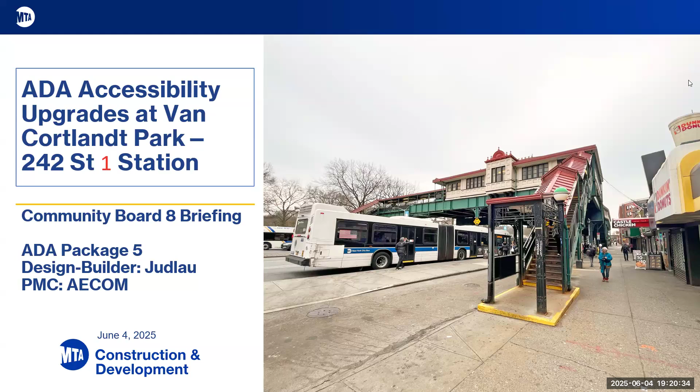Great, so some quick table setting. We're going to make some updates to you and the members of the public who are here. So we have our project scope, we'll flip through that. We have updated renderings to share with you, and we'll look at the former street view and get into why we sited the elevator here, because I know that's a question the board has posed to us in previous conversations. We'll look at the project footprint, the current MPT setup. We'll go over the milestone schedule, look at where we are, and we'll also flip through accessibility upgrades, as well as the state of good repair work at the station.

And there's a lot of state of good repair work. The station is over 100 years old, so we have a lot of work to do. Then we will review the construction impact mitigation, some of those efforts that we've taken. GCR will give a quick report, so I'll turn it back to Jonathan, and then we'll do some Q&A.

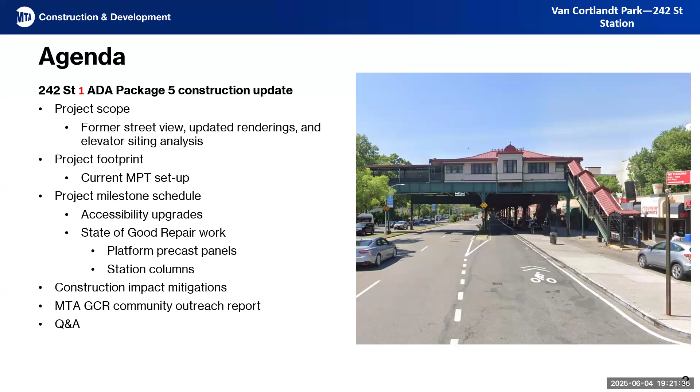Great, awesome. So like I said, the station is over 100 years old. It's a historic 1908 terminus station. We're addressing critical state of good repair work, as well as bringing ADA accessibility here for the first time, so all New Yorkers can use the station.

For ADA, we have a nice project scope of one new elevator from street to platform. And we're building a new street to platform stair on the west side of Broadway, right there in front of us, so we're just rebuilding that around the elevator. There was a stair there before, we're building a new one.

For the state of good repair work, we're going to be completely rebuilding the Island concrete platform. We'll be replacing it with concrete precast panels, and we'll be making repairs to the side platforms. We're repairing this platform's steel components, and we've also been making repairs to the station columns. Those need to be repaired, they've been there for a long time. We're replacing the island platform canopy roof, as well as the historic wooden floor in the mezzanine.

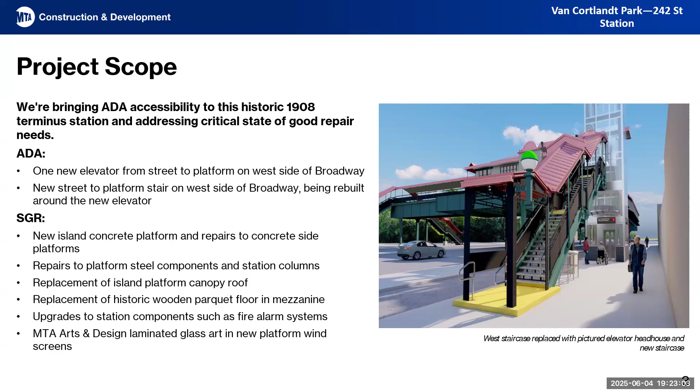At all these accessibility projects, when we're here, we're trying to do as much as possible to make the most of everyone's time. So we're also upgrading some station components, such as the fire alarm system. And we have a beautiful arts and design component in this station project -- we're going to be installing laminated glass art in the new platform windscreens.

Next slide. Okay, so here we have the street view prior to any ADA upgrades. This is, of course, what it looked like before we started construction. This is a very tight and challenging environment, and I'll get into a little bit more later why we sited this here, but I just want to show this so everyone can appreciate that we sited it at this location.

This service road, this no standing service road, allows us to set up MPT, our maintenance and protection of traffic, around our work site with the fewest impacts, not only to the flow of traffic, but also to parking. So this is a service road, it's reserved for authorized vehicles only. And by setting up here, we're actually only taking one legal parking spot. Next slide, please.

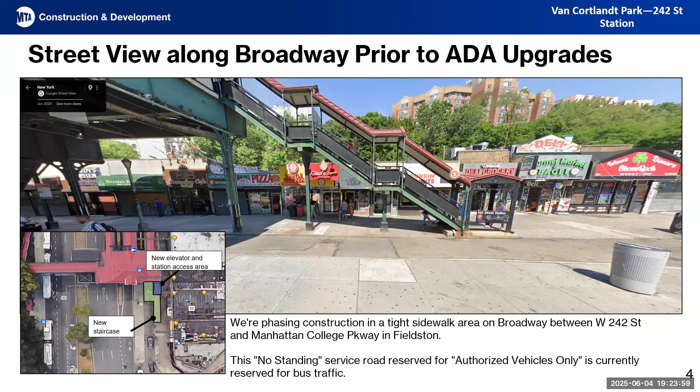Okay, so now we'll look at what it will look like after we're done. So we have a few renderings here.

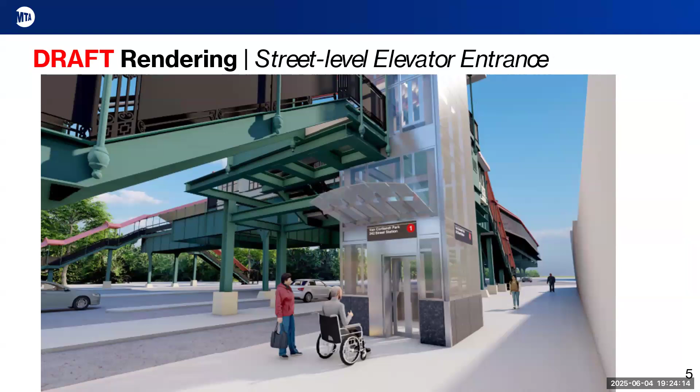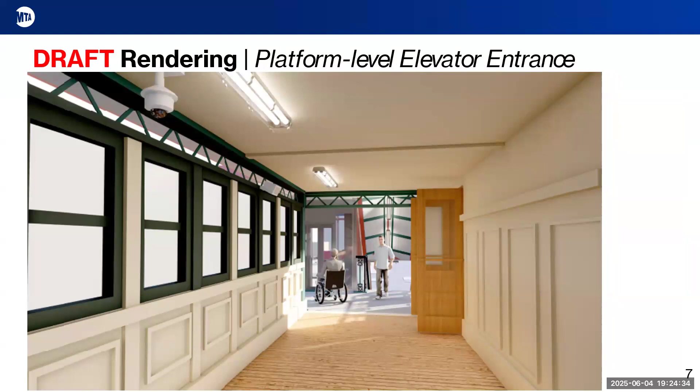Great, thanks. Okay, so more on why we sited this here. So many factors culminated to our final decision to site it on the west side of Broadway rather than on the east side.

Number one, when we're giving a new station or a station new ADA access, we really try to see it through the eyes of someone who needs this elevator to access the station, who would never otherwise be able to use the station. So for accessibility, that's the shortest path from the fare box to the elevator landing, and it's just the shortest path of travel for anyone who's in a wheelchair or any mother who has a stroller who might need to use an elevator. And that's much shorter compared to the east side.

For elevator constructability, it is very, very likely that had we built it on the east side, we would need to go through something called parkland alienation, which is a very long bureaucratic process, essentially because the park is on that side. We would have to make a deal with parks, and we would get land that is technically parkland, and then we would have to either pay or basically swap out land to compensate for that land we would be taking in order to build an elevator there.

We also looked at a ramp, but it would be very, very long, and this is a historic station, so that goes into all of the decisions we make with the design. We wanted to make it a little bit more compact to keep with the nature and the facade of the historic station components.

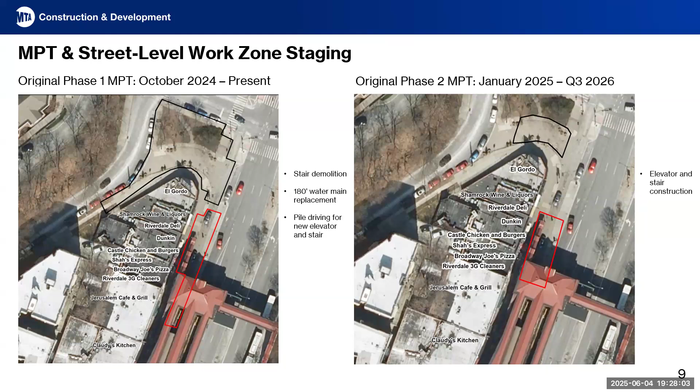We're doing the platform precast fabrication, which you'll see later, and then we'll be installing that a few months later, probably in the early fall, depending on when we can schedule more GOs. At the same time, we'll be replacing that mezzanine floor I talked about earlier.

And after that, we're moving on with the accessibility components. So we're finishing up the elevator. That means installing the glass, working on all the mechanics. We have an elevator machine room that we're also installing. And finally, the stair completion.

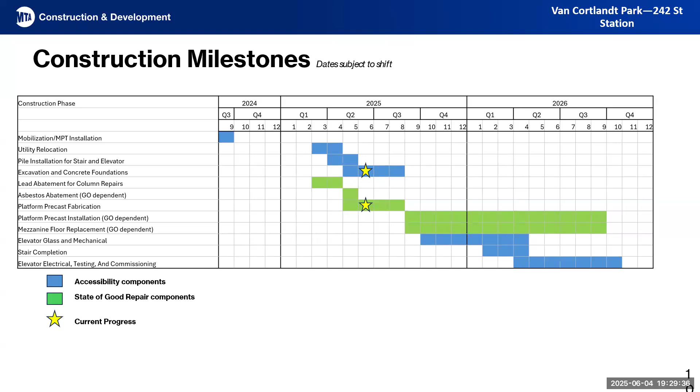And really up until the very end, we do all the electrical testing and commissioning. We run a lot of tests to make sure that this elevator will work and be good to go once we leave the site.

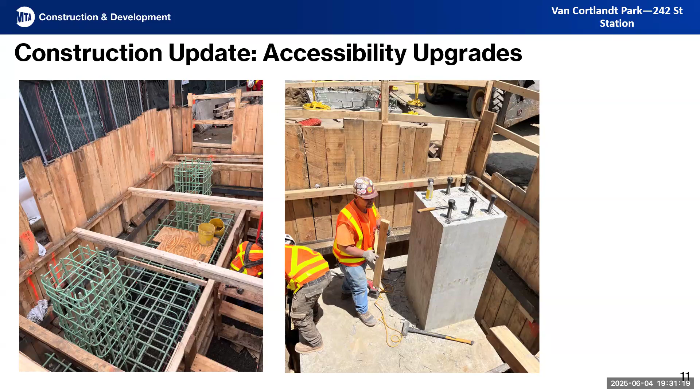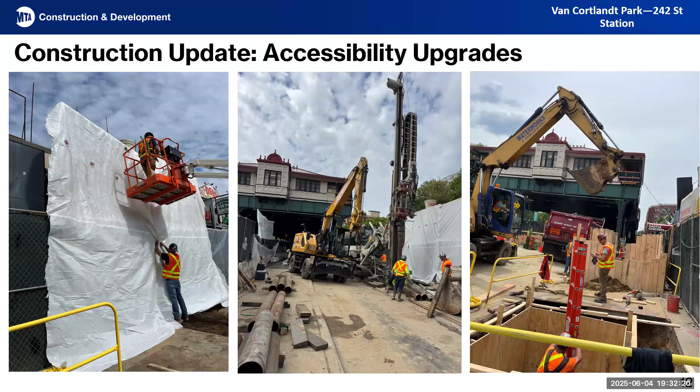State of good repair is also a big component of the contract. One of the bigger parts is the precast panel work. As of right now, the precast panels are being approved by the MTA and fabrication is underway. The entire center platform will be replaced in its entirety with new precast panels. In addition, the existing columns on the platform level will be repaired if any degradation or deterioration is identified. So that's a large component of our work, conducted on weekends during shutdowns.

We will be having a crane set up on the street level during those weekends. That'll start Thursday midnight or Saturday morning, and continue work until Monday morning, very early before the rush. We'll be staging precast panels on the street level, craning them up above so that our crews can remove the old ones and install the new ones. That'll be taking place starting in September and continuing until completion.

Also something to note, as Hannah mentioned previously, last month there was a service disruption, a one-weekend closure. During that closure, the asbestos found on the precast platforms was abated. That was done by an asbestos abatement contractor who performs this in a closed environment so that nobody is exposed to any environmental hazards.

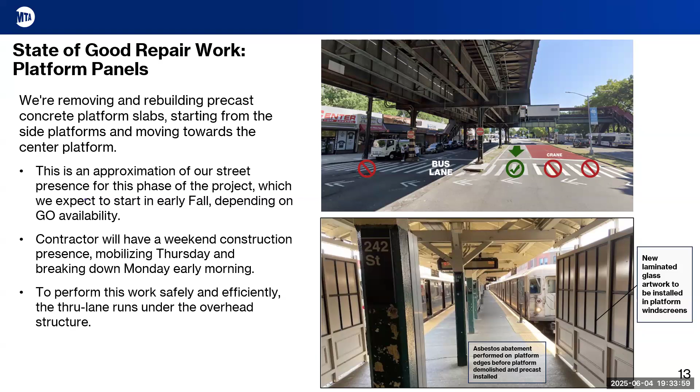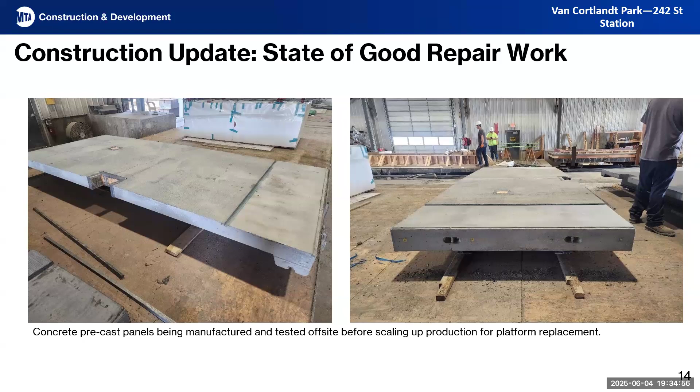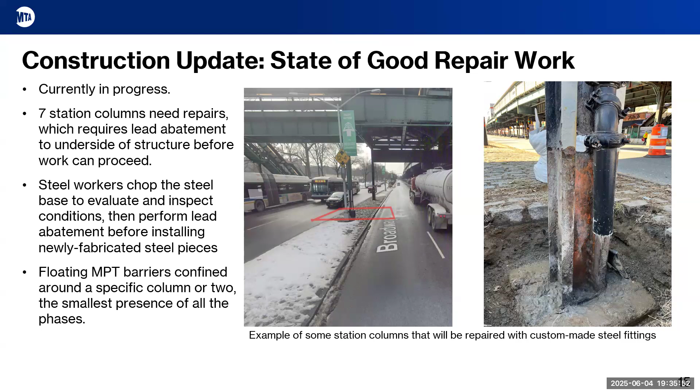Construction progress on State of Good Repair has started. This is a multifaceted piece of work. What happens first is we have to go up there and expose the columns. We abate the lead and then we assess the condition of the steel. If the steel is deteriorated and there's levels of deterioration, we take those measurements and refer back to our designer, and then we submit our shop drawings for approvals prior to going to fabrication. Right now we have exposed those columns, confirmed levels of deterioration, performed some abatement on them, and we are in the shop drawing process, soon to be fabrication. Once that steel becomes available, we'll have local MPT setups where our iron workers will come in, install the new steel, torque test, and inspection. We'll paint 3 coats to protect the steel from the environment, and then backfill accordingly.

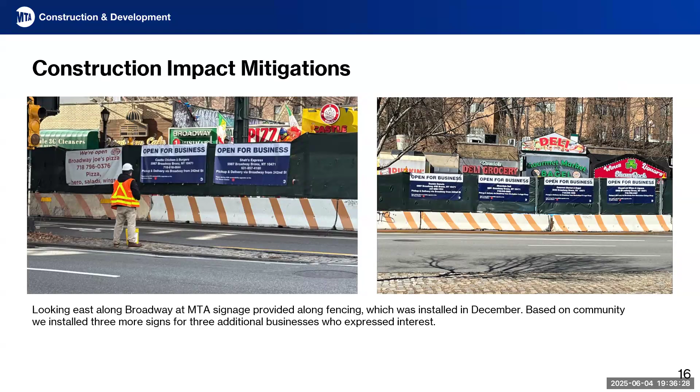Okay, and some other impact mitigations that we have implemented. At all times, we adhere to DEP mandated noise levels during construction. We really limit the jackhammering and other noisy work when we're opening up the sidewalk, as well as using drills to get through the rock bed, although that's not as noisy because the layers of dirt dampen most of the sound. With rerouting traffic, as Chris was talking about with the State of Good Repair project, specifically the precast concrete panels that we'll be using to completely rebuild the platform, we will use flaggers when that happens. That will happen much farther down the road in the fall, but we have thought out a really comprehensive traffic plan for sidewalk, crosswalk, and bus stop access.

On all of these projects, DOT requires that we have a crosswalk alternative if we need to occupy an area and close it for the work site, so there will always be crosswalks that are open. And the bus stop for the Bronx 9 bus route is just shifted a little bit down the block, closer towards 242nd Street. I'm sure many of you have seen that.

And then the closures again, so we require a few GOs in this project to do mostly the big State of Good Repair work that is involved here. During the station closures, there will be shuttle bus service provided, and Jonathan will send out construction advisories far in advance so that everyone can plan their trip, plan their weekend a little bit better.

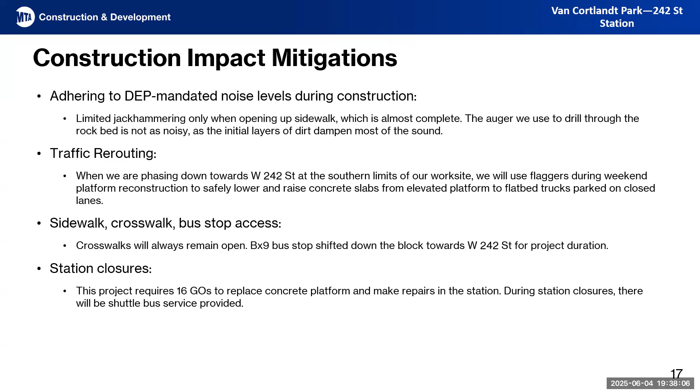Great. Thank you. So now I will turn it over to Jonathan.

Yep, thank you, Kana. So now I'm going to talk a little bit about the community outreach we have done. We have actively been engaging with local businesses, listening to their feedback, and taking direct action to address their concerns. Before the project began, we did storefront outreach. In October, we had outreach calls with local businesses affected by the MPT. In January, we did a site visit with local businesses as well, so we could give them a sense of what they can expect in the MPT. We have also, in March, provided a construction update to elected officials and the community board.

Some of the actions we have taken: every business has an open for business banner on the MPT, so customers know they are open for business, and also that they are able to accept deliveries. We have also expanded sidewalk access from 5 feet to over 6 feet to improve pedestrian flow and provide better access to cellars for business owners. We have also installed lighting to enhance visibility and safety, ensuring the walkway is fully illuminated during dark hours. We also have a dedicated hotline and email for businesses and community stakeholders to report any issues they have and receive a timely update from our team.

Now we're going to open the floor up to questions.

Later in May, we met with the Bronx CB8 Executive Committee, where we responded to a number of questions and comments they had for us about this project. We shared extensive feedback with the board, detailing our responses to their questions.

Later in May, our 'What's Happening Here' construction notice was published on our website. It's been posted across the corridor on Bailey Avenue and released to elected officials as well. Today is June 4th - here's our final informational presentation to the June CB8 Traffic and Transportation Committee meeting.

This is the project timeline for construction. Later this month, concrete construction will begin at 4 intersections: West 230th Street, West 233rd Street, West 234th Street, West 238th Street. Van Cortlandt Park South is part of a larger project that goes into the park, which was first presented to the community last year.

Bailey Avenue will also be resurfaced, scheduled for late summer. Following the resurfacing, markings and vertical elements will be implemented, and the full project should be completed by fall 2025.

This is the project location: Bailey Avenue from Van Cortlandt Park South to West 225th Street. It's 1.1 miles, adjacent to the Major Deegan Expressway, and a block from the 1 train on Broadway.

There's a mix of uses along the corridor - residential, commercial, light industrial, and some parks between 233rd and 234th Street. There are 2 bus routes that use Bailey Avenue north of West 230th Street, and it's also a marked local truck route.

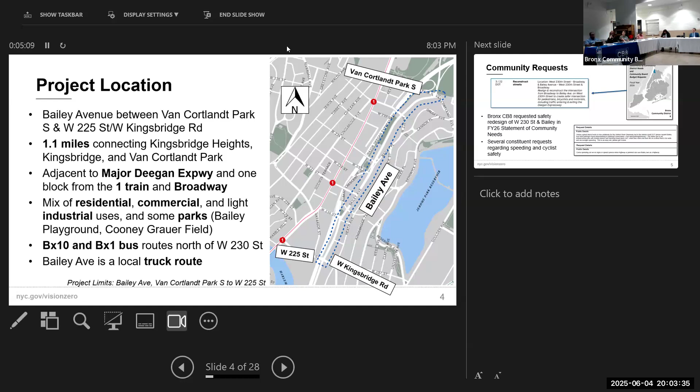We first started looking at this project in response to community requests. Community Board 8 made a request to DOT regarding safety at the intersection of Bailey Avenue and West 230th Street. We also received constituent requests about pedestrian safety, cyclist safety, and speeding on the corridor.

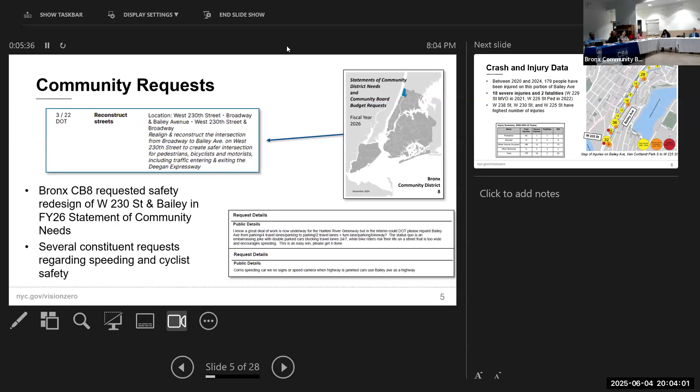This is borne out in the data - this is really why we're here. I want to reinforce this slide, because to me it's the most important one. Between 2020 and 2024, in those 5 years, 179 people have been injured on this 1 mile corridor of Bailey Avenue.

There were 18 severe injuries and 2 fatalities. We highlight these severe injuries and fatalities because we call it a DOT KSI - killed or severely injured. This is shorthand for us to know where to dedicate our resources. The number of KSI incidents is 20: 18 severe injuries and 2 fatalities.

This is why we've been focusing on Bailey Avenue - it's an abnormally high number of crashes with severe injuries and fatalities that change people's lives and families' lives. I'll call out that 238th, 230th, and 225th Street are our most problematic locations - some of the busiest intersections with a lot of pedestrian and commercial activity.

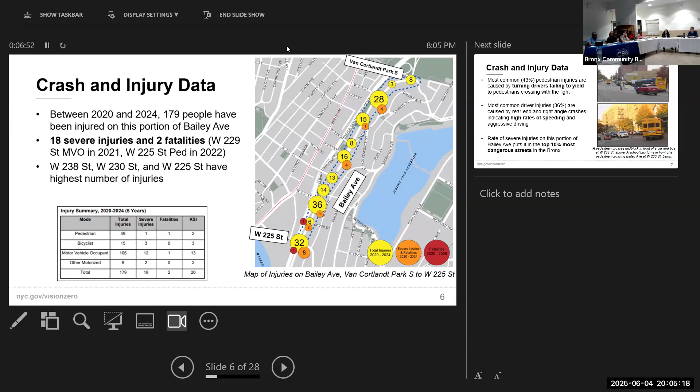We looked into the crash data under the hood to look at how these crashes were occurring. We have police crash data for all the crashes on the corridor, and the most common pedestrian injuries were drivers failing to yield. These were pedestrians crossing with the right of way in the crosswalk, doing the right thing, and still hit by a car that was supposed to yield to them. So 43% of the pedestrian injuries occurred when drivers failed to yield in the crosswalk.

The most common driver injuries, of which there are many, are rear end or right angle crashes, which indicate high rates of speeding and aggressive driving, which is obvious if you just spend any time on the corridor. As I said earlier, this rate of severe injuries puts it in the top 10% of the most dangerous streets in the Bronx.

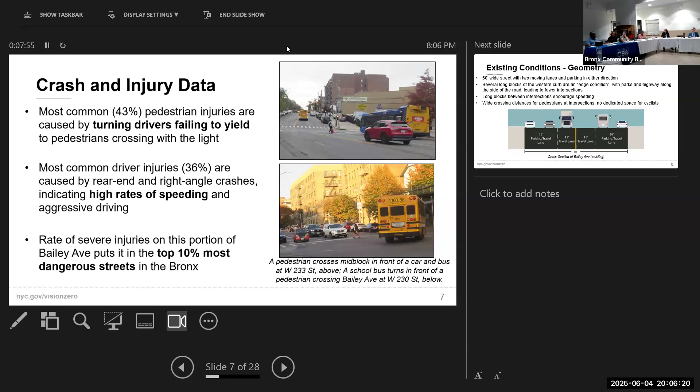Next slide, thanks. This is a cross section of the corridor. The left side is cut off, I'm not sure why, but in general, there's some areas that are a little different. In general, we have a 60-foot cross section of Bailey Avenue with 2 moving lanes in either direction and a parking lane along the curb in either direction.

We also have several very long blocks. This is because the west side of Bailey Avenue is something we call an edge condition, where we're adjacent to the Major Deegan for many of those blocks. So those long blocks further encourage speeding because there's nothing in between 225th and 230th Street. It's just a straightaway, so there are opportunities for further speeding along those edge conditions.

And then at intersections, we have at minimum, sometimes larger than 60 feet for pedestrians to cross. So there's very wide crossing distances, and we also have no dedicated space for cyclists.

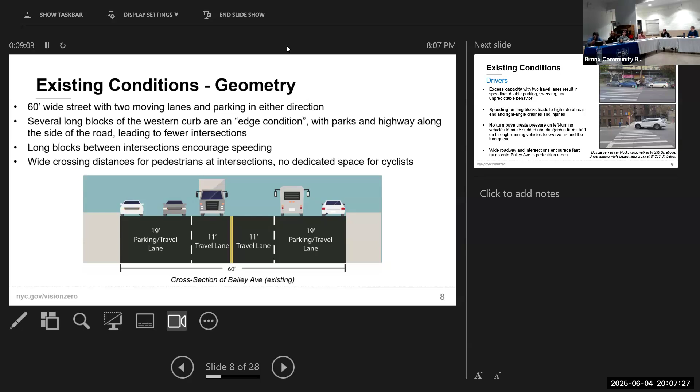Next slide. Going further into the existing conditions, for drivers we see excess capacity. These 2 travel lanes are often not full, and we have speeding, double parking, swerving, and generally unpredictable behavior along the corridor. As we said earlier, this high rate of speeding leads to a high rate of rear end and right angle crashes and injuries.

And then we see this issue at basically every intersection on the corridor: there are no turn bays for left turning vehicles. This creates pressure if you're a vehicle in the left lane wanting to make a left turn, and there's a car behind you that just wants to go straight but they're in the left lane. They're putting pressure on you to do something erratic, something quick, and that's why we see some of these crashes.

So it's dangerous for pedestrians and drivers trying to navigate these intersections where you have speeding cars and a lot of swerving and unpredictability. Again, the wide intersections encourage fast turns. There's nothing really preventing drivers from taking a highway-like turn onto Bailey Avenue, coming off the highway maybe, and that's why we see some of these failure-to-yield turning injuries for pedestrians.

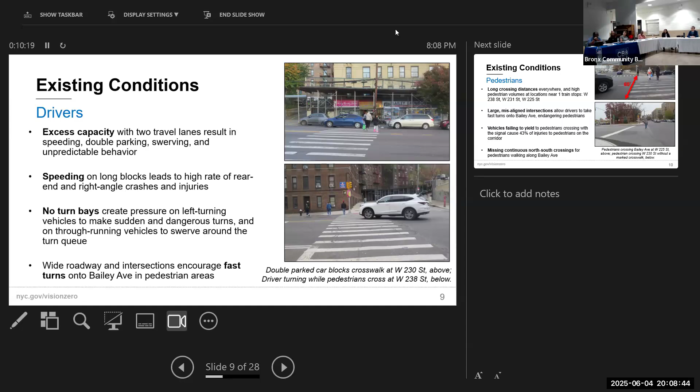Next slide. For pedestrians, there are long crossing distances everywhere, and particularly adjacent to the 1 train we see high pedestrian volumes. We took counts of pedestrians at every intersection, and saw the highest numbers at 238th, 231st, and 225th Streets. In a number of cases these intersections are not right angles, they're misaligned, a little off, so the turns are kind of shallow and can be made very quickly, which again endangers pedestrians.

As we said earlier, 43% of the injuries on this corridor are due to failure to yield. In a couple of locations, including this one at West 230th Street along the west side of the curb, we're missing crosswalks for pedestrians. This happens in a few locations, but as you can see, pedestrians still cross in a quite unsafe manner. This also happens at 234th Street right over here; there are a couple of slip lanes that don't have crosswalks across them.

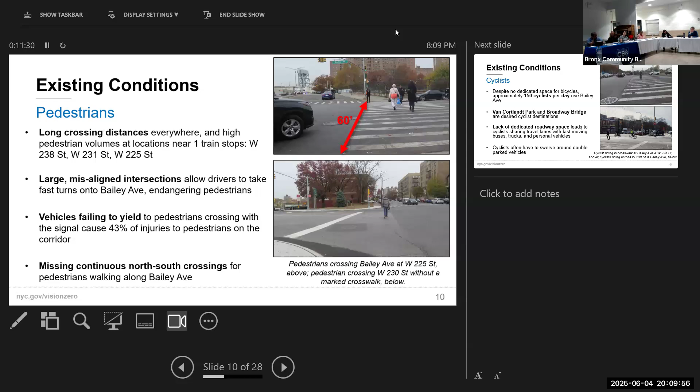Next slide. For cyclists, despite no dedicated space for bicycles, approximately 150 cyclists per day use Bailey Avenue. Many of them are going towards Van Cortlandt Park to the north, or to Broadway Bridge to the south to get to Manhattan. The lack of dedicated roadway space leads to cyclists sharing travel lanes with fast-moving vehicles, buses, trucks, and the swerving and double parked cars we've just been discussing, which is an unsafe situation.

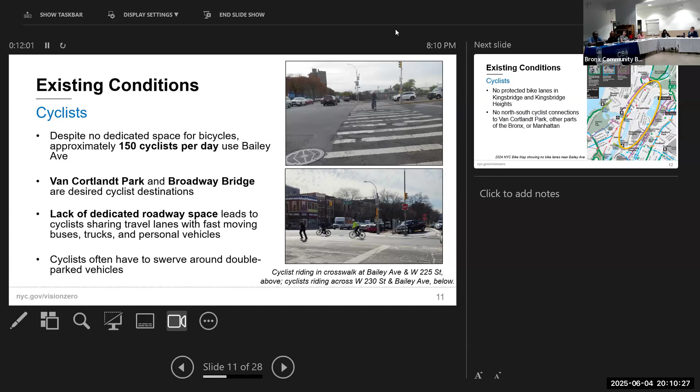Next slide. This is a bike map of the Bronx, and you can see there are no bike lanes in Kingsbridge and Kingsbridge Heights.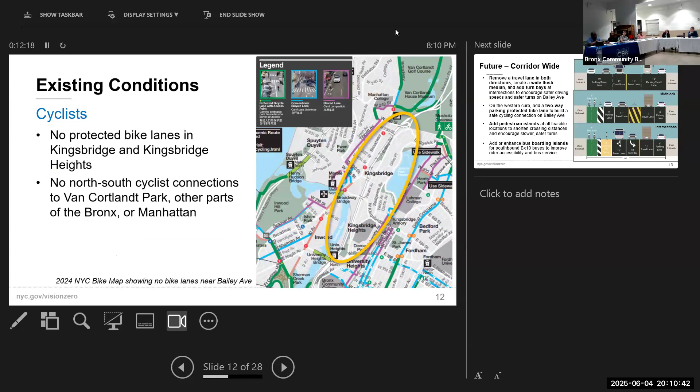So there's a gap in the network that's also in the current condition. Next slide. So this is the future condition on Bailey Avenue.

We're planning to remove a travel lane in either direction, create this wide flush median, and add turn bays at every intersection to encourage safer driving speeds, safer turns, and better vehicle organization. In the excess space on the west curb, there will be a two-way parking protected bike lane to build a safe cycling connection on Bailey Avenue.

At all feasible locations along the corridor, there will be new pedestrian islands, both in concrete and in paint, to shorten crossing distances and to slow down vehicles making turns onto Bailey Avenue. And in a couple of locations, for the southbound BX10 bus, we're going to be adding or enhancing bus boarding islands to improve rider accessibility and bus service.

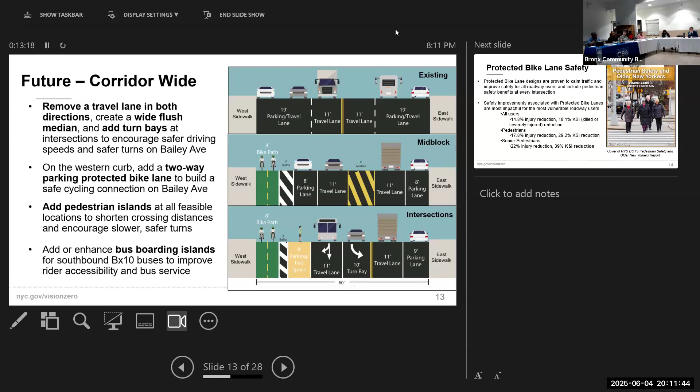Next slide. I just want to mention that we've done studies at DOT about designs like this one. In 2022, there was a pretty extensive study about these projects that DOT has been pursuing around the city for a number of years now. So we have a lot of good data about the safety benefits of it.

And we see that for all users, not just cyclists, but pedestrians and drivers, we see a nearly 15% injury reduction, but an 18% reduction of those KSI, killed or severely injured injuries. And I just want to call out the major piece of data from this study we want to highlight: for senior pedestrians, these types of projects result in a nearly 40% reduction of severe injuries and fatalities. So we see extremely meaningful and significant benefits for all road users when we install protected bike lanes, such as the one we're planning on Bailey Avenue.

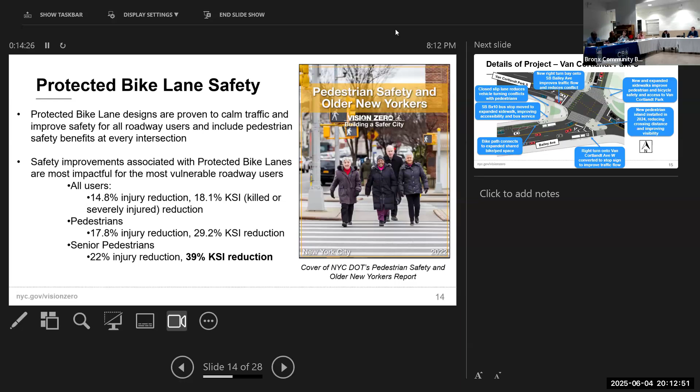Next slide, thank you. So I'll go through every intersection. Every intersection is different, as Anthony mentioned. And then I'll start from the north, head to the south, and then we'll be done. I can take some questions.

So starting at Van Cortlandt Park South, this is a project that's more extensive, that goes into the park. It's something DOT has been looking at for a bit longer, so I'm not going to go into all of it. This is something that's actually been presented to the board a number of times, but I'll just describe what's going on at this intersection and how it relates to our project.

So starting on the east side of the intersection, we actually installed a pedestrian island on the southeast corner last year. So that's in place already, this island right there. But in addition, the sidewalks are going to be expanded all along the north leg of the intersection. There will be a new bike path that connects to the rest of the bike trail farther north in Van Cortlandt Park, creating that connection.

This northbound right turn will be converted into a stop sign to improve traffic flow if you're going north onto eastbound Van Cortlandt Avenue West.

But on the west side of the intersection, on the southwest side, we are going to be closing this slip lane for eastbound vehicles that want to make a right turn to go south on Bailey Avenue. In its place, we're going to be adding a new right turn bay, which will actually overcompensate for that reduction in capacity and keep traffic flow moving very, very well.

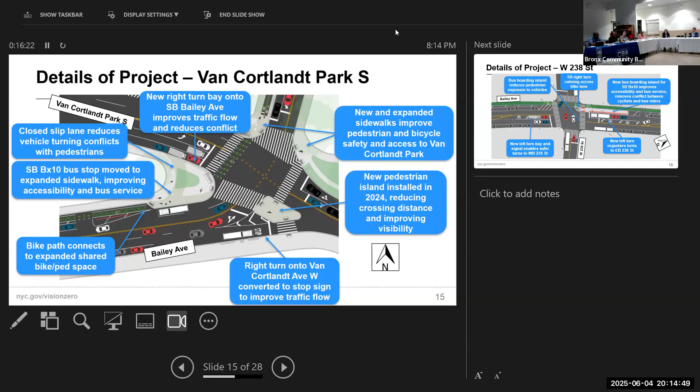Heading south to West 238th Street, the big change here is there will be a new bus boarding island for southbound BX10 buses. This, as I said earlier, improves accessibility for riders using the BX10 bus. They get to wait and the bus pulls right up to them. And it removes the conflict between cyclists and bus riders, and also calms the turns for vehicles making the right onto westbound 238th Street.

We're also going to be adding a new left turn bay for southbound vehicles on Bailey Avenue that will go east onto West 238th Street. And for northbound vehicles on Bailey Avenue, there will be a new left turn bay and a new protected left turn signal so that they can make that turn without any conflict to pedestrians or cyclists.

Next slide. Okay, this is right outside our building right now.

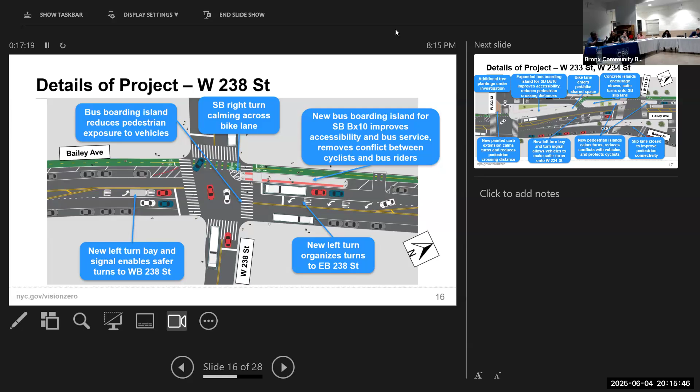This is West 233rd and West 234th Street. I'm going to go through it from north to south. This slip lane right here, right outside, will be closed. There's actually no legal movement through it because West 234th Street goes west. So we're just going to close it with concrete so that pedestrians can continue north-south without any conflict with vehicles.

We're also on the west side going to be installing 2 new large pedestrian islands. These will calm turns, reduce conflict with vehicles, and protect the cyclists using the new bike lane along the west curb. For northbound vehicles, there will be a new left turn bay and a new left turning signal that will allow them to make turns without conflicts to pedestrians or cyclists.

Pedestrians and cyclists will now connect to a new significantly expanded bus boarding island at West 233rd Street. The dotted red line is the current outline of the bus boarding island there. It's going to be basically doubled in size, and that will be a shared space for cyclists, pedestrians, and bus riders. There'll be extensive space for them, and the bike lane will continue farther south of West 233rd Street. We're also going to add a new painted curb extension at West 233rd Street, again calming turns and reducing crossing distance for pedestrians.

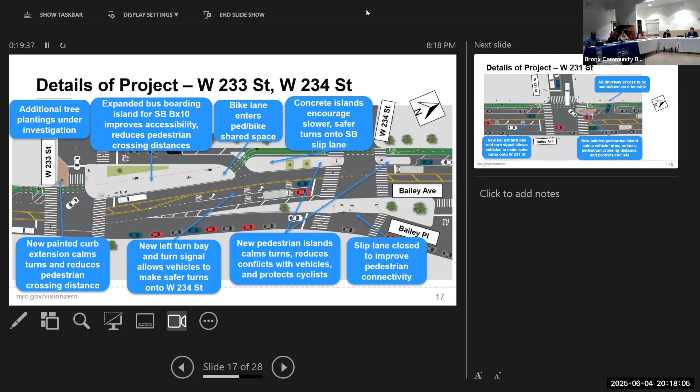Next slide. So on West 231st Street, there's going to be a painted pedestrian island, again calming vehicle turns, reducing crossing distance for pedestrians, and protecting the cyclists using this west curb. Then for northbound vehicles, there will be a new left turn bay and a new left turning signal, again allowing those vehicles to make that turn with no conflict to pedestrians or cyclists.

I also want to call out this design here where there's a driveway. This exists across the corridor for Bailey Avenue, where there are driveways along the west curb. We will be maintaining access to all of those driveways with designs such as this one, so that visibility and access is always maintained. Next slide.

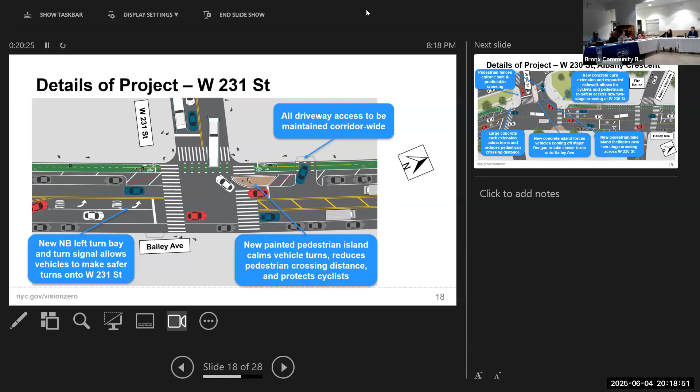So this is West 230th Street and Albany Crescent. This is split into 2 slides because there's a lot going on here. This is one of the more confusing parts of the intersection of the corridor for all users, so we're proposing a lot here. The bike lane will continue south on the west curb of Bailey Avenue, and it will lead into a new concrete curb extension at West 230th Street, where

And I think that's everything for this slide. Next slide.

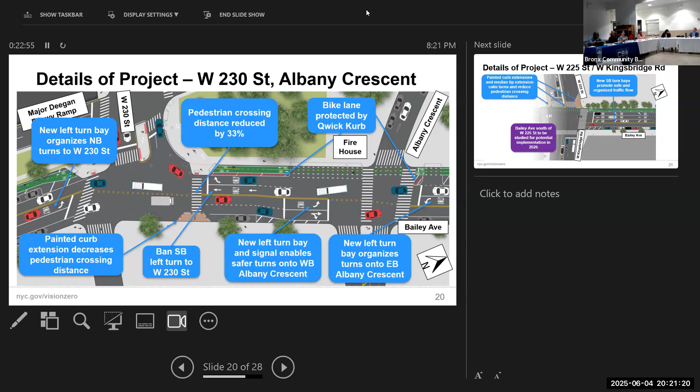Next slide. And then finally, West 225th Street, we're adding two new turn bays to promote organized traffic flow, both left and right turns here. We're adding new painted curb extensions along the bridge over the Major Deegan, and median tip extensions, again significantly reducing pedestrian crossing distance and calming all of the turns off of that outrageously busy intersection. And there's a school on the southeast corner of that intersection, so we need to do something there.

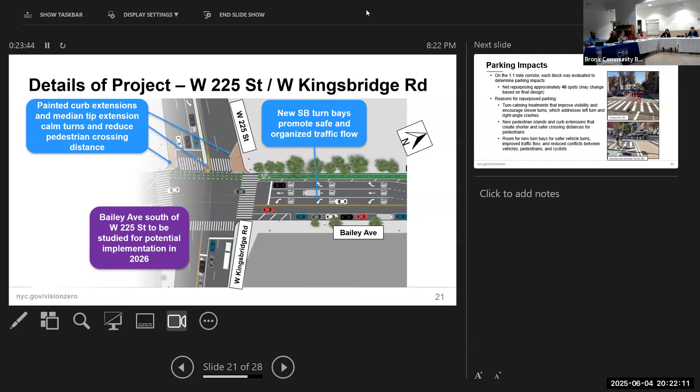South of the intersection, you can see that this kind of shades out a bit. I just want to note that we are considering extending this design south of West 225th Street for future implementation seasons. Next slide.

So parking impacts. On the 1.1 mile corridor, each block was evaluated to determine parking impacts, and we've estimated that approximately 46 spots will be repurposed. And I just want to call out the reasons for this repurposed parking.

At intersections, as we went through the presentation earlier, in order to have these safety benefits that calm turns, slow turns down, and create more visibility, we need to install designs like this one or like this one, where you have to pull a spot or two out and replace it with a painted pedestrian island or a turn calming treatment like Qwick Kurb over there.

These treatments encourage slower turns, and they address the types of crashes that we see in the data all along Bailey Avenue. These new pedestrian islands and curb extensions create shorter and safer crossing distances for pedestrians. And then we also needed to repurpose some spots for turn bays, again to make safer vehicle turns, improve traffic flow, and reduce the conflicts between vehicles, pedestrians, and cyclists.

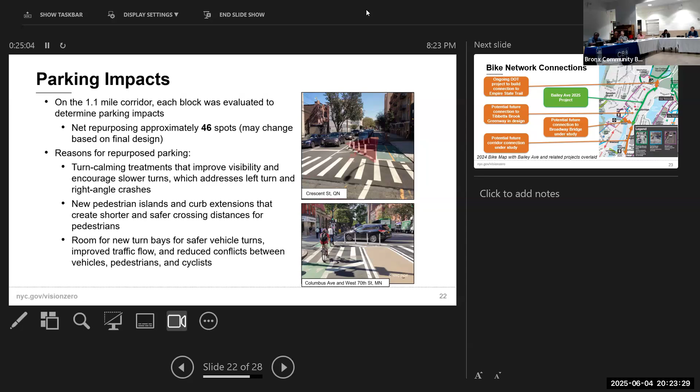Next slide. Just the last few slides here, I want to call out the connections. In that earlier slide, there was a gap in the bike network. This is adding a new protected bike path through Kingsbridge. It's going to connect to that ongoing project to the north at Van Cortlandt Park South, which connects it to the Empire State Trail and Canada, like Anthony was saying earlier.

And then on the south part of this at 225th Street, I want to note that we are looking at a potential future connection along 225th Street to Broadway Bridge, as well as a potential future connection to the south further along Bailey Avenue. And I do want to call out a project that may be on your radar: a future capital project on the corridor for the Tibbetts Brook Greenway along the Major Deegan on the west side.

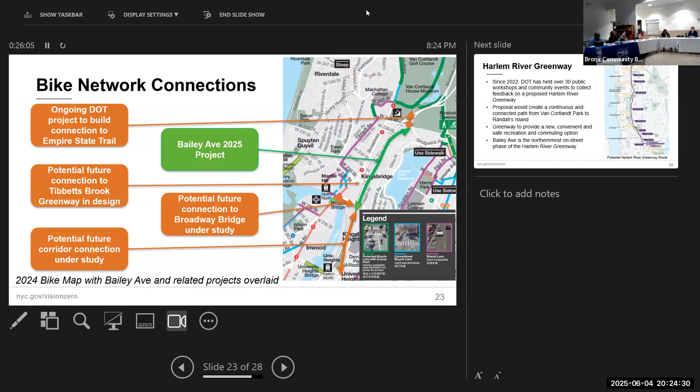This is a longer term project that Parks and DEP is working on. And this project will promote the connectivity to that new greenway in the future, although that's probably five years away as far as I understand.

Next slide. We mentioned the Harlem River Greenway earlier, I just want to mention it again. Since 2022, DOT has held over 30 public workshops and community events to collect feedback on this proposal that connects Van Cortlandt Park to Randall's Island.

And it will create a new greenway to provide a new, convenient, safe recreation and commuting option. As you can see in this slide, there's this purple, that's the on-street part of it where we can use our resources as DOT to create this greenway. The orange are some more longer term projects like that Tibbetts Brook capital project, but the purple are things that we can do on street more quickly using in-house resources. And Bailey Avenue is the first major northernmost part of this Harlem River Greenway project.

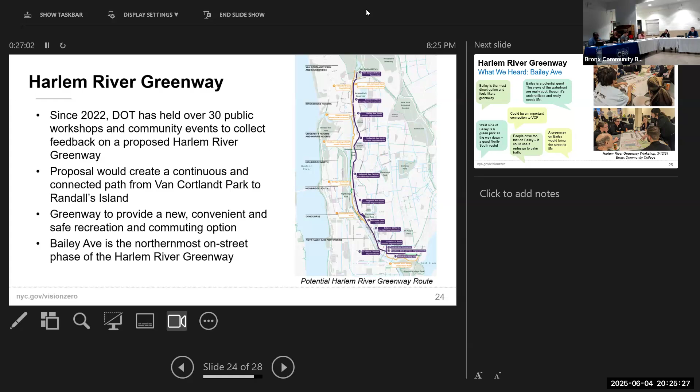Next slide. We mentioned all of the outreach that we did for the Harlem River Greenway. I just want to say that when we did these community events for Harlem River Greenway, we heard a lot about Bailey Avenue, a lot of things that we talked about today. People concerned about safety, people concerned about pedestrian safety, not just cyclist safety, and people recognizing the opportunity that we have to transform this corridor and really address the concerns about pedestrian and driver safety, while also creating this new connectivity to the greenway and to the parks. Next slide.

So what was the last slide? In summary, these are the project benefits.

We have a lane reduction on Bailey Avenue that organizes the roadway, calms traffic, and adds new turn bays and turn signals to promote predictable and safer vehicle behavior.

At every intersection, as we went through, there are substantial pedestrian safety improvements that will be experienced by all users, reducing conflict points with drivers, increasing visibility, and shortening the crossing distance.

There's going to be a new protected bike lane, 1.1 miles in both directions. That's 2.2 miles of dedicated space for cyclists through Kingsbridge and Kingsbridge Heights, providing safe connections to Van Cortlandt Park and other neighborhood destinations. And there are new bus service and accessibility improvements for the southbound BX10.

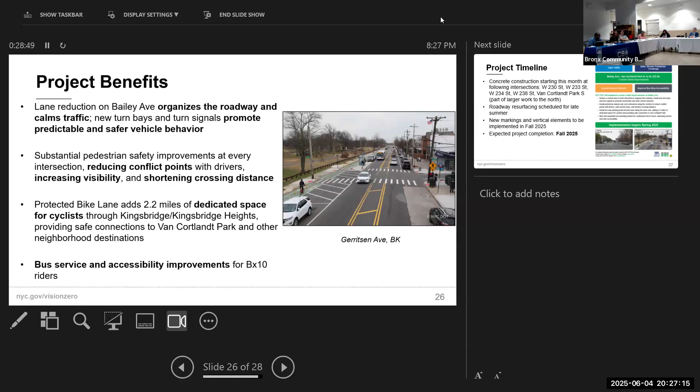Next slide. Just to summarize, we showed this at the beginning of the presentation. Here is the construction timeline. We'll be beginning later this month at those intersections: 230th, 233rd, 234th, and 238th.

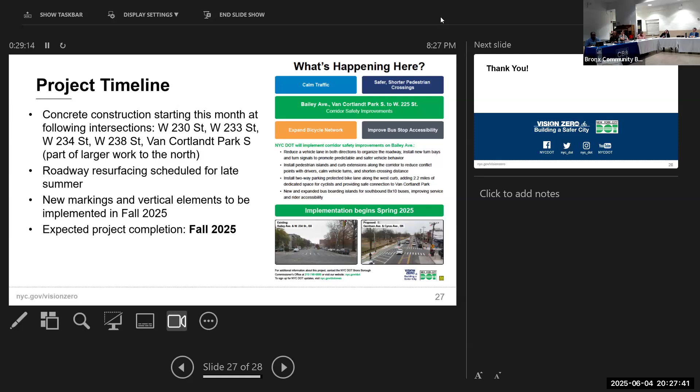Roadway resurfacing will take place later in the summer, with the new markings and vertical elements to be installed by the fall. That is it. Thank you very much, I appreciate your time.

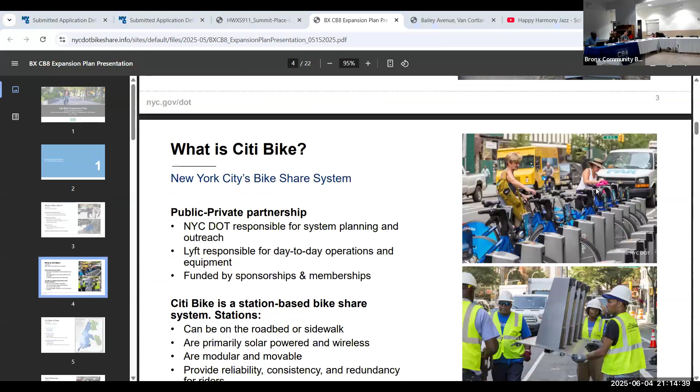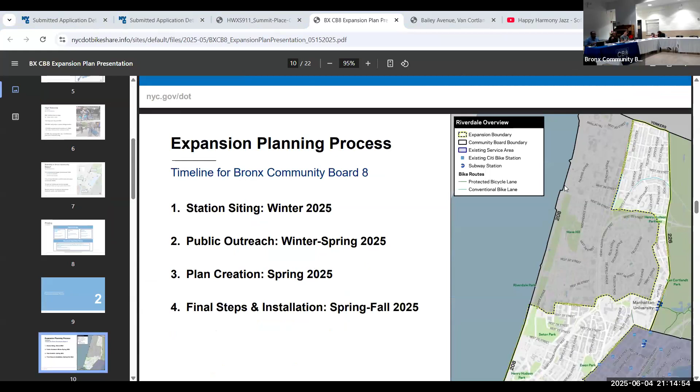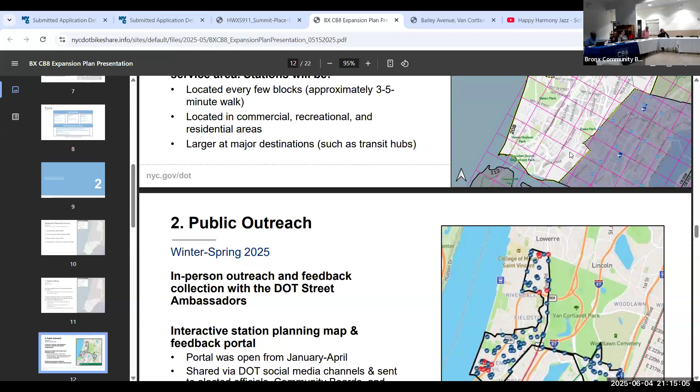The bike program is a shared bike program. It's to help with improving mobility. Let's skip to the areas that it's going to impact and its locations. Just like this presentation, it does impact people's ability to move around. They're looking at adding on 22 new stations.

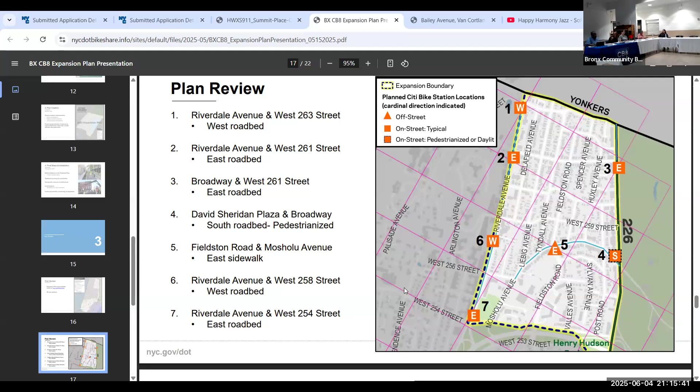And on a map, they have the plan specifically. They want to have a station at Riverdale Avenue West 263rd Street on the roadbed. The second location is Riverdale Avenue and 261st Street East roadbed, Broadway and 261st Street and the roadbed there, David Sheridan Plaza and Broadway, Fieldston Road and Mosholu Avenue on the sidewalk, Riverdale Avenue, 258th Street West on the roadbed. Number 7, Riverdale Avenue and 254th Street East on the roadbed.

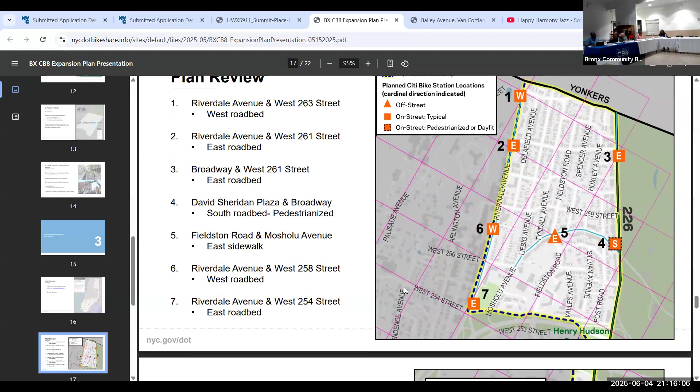And Broadway, 252nd Street East on the roadbed. Post Road and West 251st Street West on the sidewalk. Broadway, 251st Street and the East roadbed. Waldo Avenue and Manhattan College Parkway East roadbed.

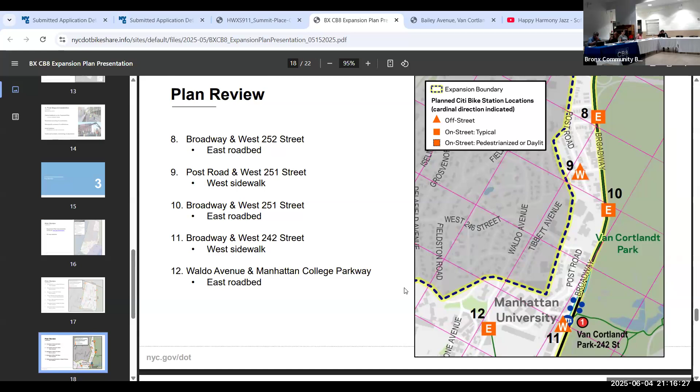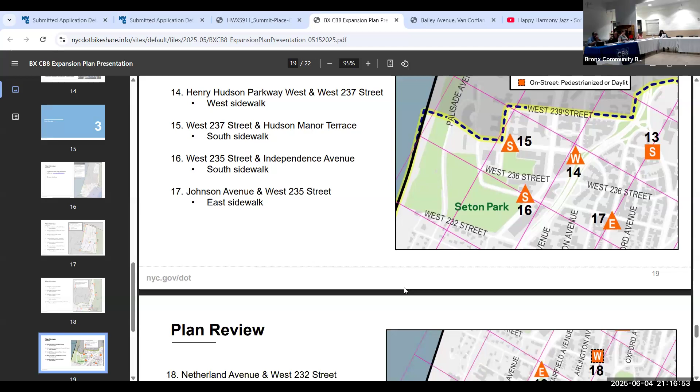238th Street and Riverdale Avenue South roadbed. Henry Hudson Parkway and 237th Street West on the sidewalk. West 237th Street and Hudson Manor Terrace. West 235th Street and Independence Avenue South sidewalk. Johnson Avenue and West 235th Street East sidewalk. Netherland Avenue, 232nd Street and West on the roadbed.

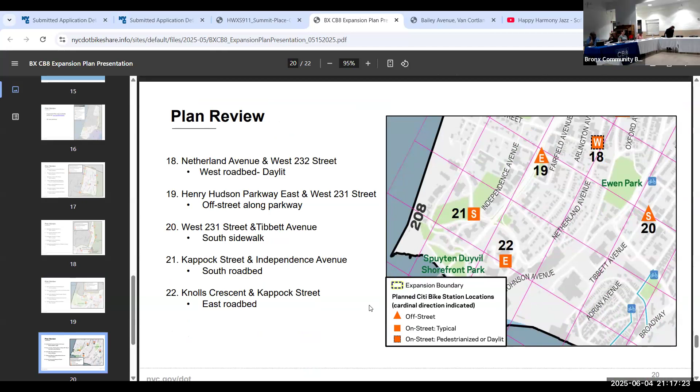Henry Hudson Parkway East and West 231st Street off the street along the parkway. West 231st Street and Tibbett Avenue and South on the sidewalk. Kappock Street and Independence Avenue South on the roadbed. And Knolls Crescent and Kappock Street and East on the roadbed. So a great deal of the issues is with the location of where the Citi Bikes are going to be and on the roadbed itself.

So does the committee have anything to say about Citi Bike? The community? Yes. Use the mic.

How are you? My name is Mario. I'm actually one of the owners of Salvatores of Soho. I'm against this location, not against the Citi Bikes, but against where they want to put it. Taking parking is absolutely a disaster. Right now we have triple parkers, not just double parking. Regular parking doesn't exist anymore on Riverdale Avenue. Luckily, thank God, we're busy, but I am against the double parking too, and imagine having these 2-3 spots being taken off from us, it is gonna be a lot of damage for us. I would try to relocate it. It could be on Riverdale Avenue, but somewhere where no parking should be taken out.